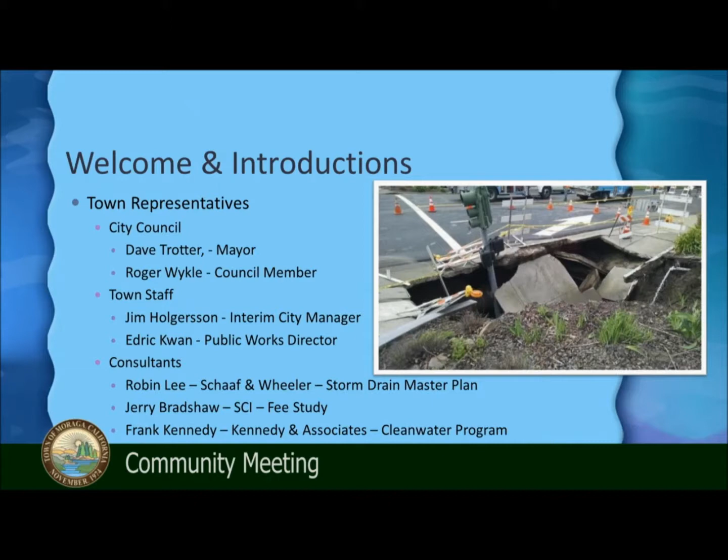So why are we here? I want to leave it on this slide for a minute. This is the infamous sinkhole right down the street here at Rheem Boulevard. This is what everybody saw from above as it was happening. But what you can't see are all the utilities underneath the ground there, including a PG&E high-pressure gas line that the signal light foundation actually fell on and ruptured. We were very fortunate that we had first responders on site immediately, got PG&E out here, and they were able to shut off the gas, so there was no explosion. As bad as the sinkhole was, and it took us a while to repair, mainly because of reimbursement issues, it could have been much, much worse.

So why are we here? This sinkhole - this is underground, let me cover that real quick. This is the culvert underneath the ground in the picture I just showed you. It's an 8-foot diameter corrugated metal pipe culvert, or CMP. Typically CMPs have a lifespan of about 50 years, and that's about where we are with this one. It rusted out at the bottom - what happens is they corrode, water goes through the corrosion, all the fine material in the soils is washed away, holes get bigger, material gets washed away, and eventually you have a void, and everything above it falls into the hole. This cost us about $3.3 million.

We fully expect most of that will be reimbursed, but it's going to take quite a bit of time. So we said, all right, what are we going to do about this? We conducted a survey last fall to assess the public's opinion and check their pulse on the issue, and we were happy to see that 87.5% of respondents value the town's quality of life. Also, 2/3 want to upgrade this aging storm drain system. We also asked, okay, that's one thing to do, but would you mind paying for it? Sure enough, Moraga homeowners were clearly interested in a local funding option to address these needs.

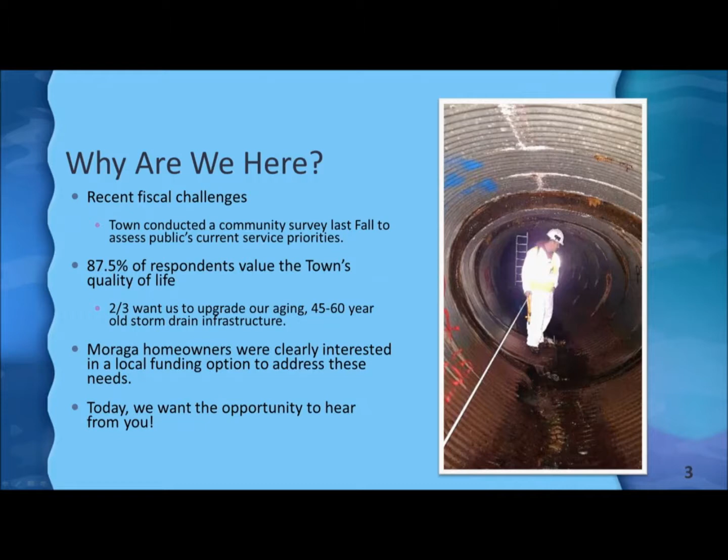So we're going to try to speed up our presentation as much as possible and leave some time for questions at the end. I have one more slide here, just to give you a timeline on where we've been more recently. I applaud the town council back in 2009, prior to my time, when they developed the Revenue Enhancement Committee.

They came up with some critical areas that need investment. They were the roads and storm drains primarily. So the roads were considered to be the highest priority at the time. They started working on that, and that was passed back in 2012, and then the street program was rolled out in 2013.

I think it's important to note here, as part of the road program, if we're going to redo a road, do a full reclamation type of project, and there's a storm drain underlaying it, we will use Measure K funds to fix the storm drains. But it's only isolated areas, mainly catch basins and things that are closer to the surface of the road.

So after Measure K was done, we said, all right, let's turn our attention to storm drain master plan. The master plan was authorized in 2014, completed and adopted in 2015. So we went out again to kind of say, all right, what are the top priorities for the town? That was done in 2016.

Again, storm drains were high on the list. So we looked at various funding options for how we're going to tackle this, and we did a follow-up survey in 2017 with some actual dollar amounts and how they tested. And again, they were supported by the town during that survey. So that's it for me.

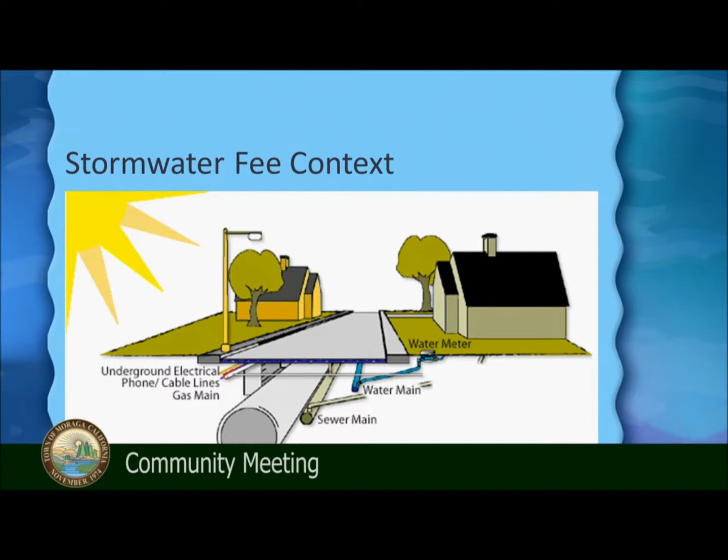The cartoon you see up there, that little diagram, shows a typical residential street - the houses, the street, and the sidewalks. And most of you realize that under the street all the utilities are buried, serving all the properties and helping make it a nice neighborhood. So you're familiar with a lot of those. I'm just going to walk through them. Most of those are utilities - you pay utility bills on those. For instance, the water and the sewer line.

You pay a water bill to East Bay MUD, and you pay your sewer to Central San. And over on the other side, you see the PG&E gas line, electric line, phone line, cable TV - those are all utilities that you pay a monthly bill for in one fashion or another. That last pipe you see there in the middle, that's the storm drain pipe, but there's no storm drain bill. You don't get a utility bill for the storm drain. That's very common for cities in the Bay Area and California, and to some extent across the country. Storm drain utilities are kind of the forgotten child out there.

But that's quickly becoming a bigger and bigger problem for all cities, just like it is here in Moraga. We've tried to put some dollar numbers to all these bills you might be facing each winter.

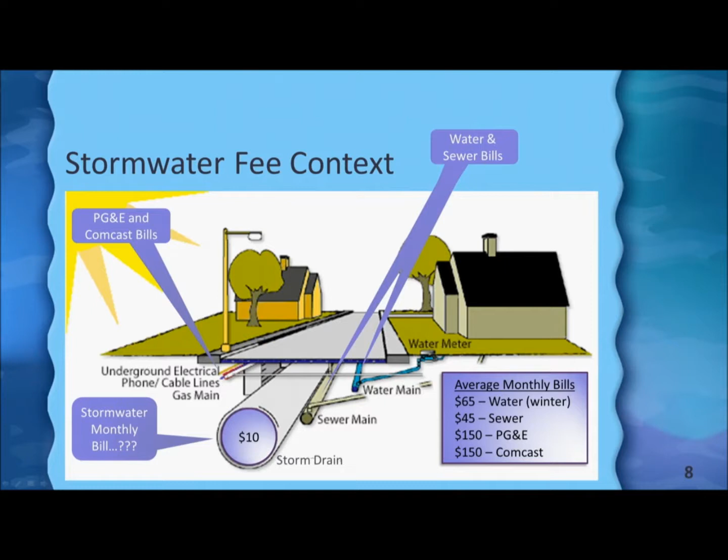Water bill, 65 or maybe more. I think a lot of you maybe pay a little more than that. Sewer bill, around 45. PG&E and Comcast can range all over the place, but they're usually into 3 figures at some point. The stormwater bill, what we're looking at is about $10 a month for the average home. So that's some context I wanted to put in place, and it gives you a historical perspective of what the storm drain utility picture has looked like.

The process I want to talk about is important because this process we're going through isn't something most of you have been through before. In fact, it's kind of new to the state.

In 1996, the voters of California passed Proposition 218. It was brought to you by our friends at Howard Jarvis Taxpayers Association, and you may know that name from Proposition 13. They're the authors of that, and that's where they got their big start. So they put together the Right to Vote on Taxes Act in 1996, and it was made part of the Constitution, and is literally the grandson of Prop 13.

I remember when I first started working for cities in the early 90s, we used to, in order to implement a fee, just adopt it and put it in place. And people would cry, well, what about Prop 13? You have to vote on that. And we would say, it's not a tax, it's a fee. And I think there was a lot of that going on, probably more than there should have been. So Howard Jarvis decided those were some loopholes they needed to close, and maybe rightly so.

In any event, we have Prop 218, which is our guiding document, our guiding law in this situation. The storm drain fee is called a property-related fee, and that was a category that was created by Proposition 218. They had never had a category for that thing before, so they did that, and it is for the types of fees like your water fees, sewer fees, and garbage fees. And that's what they had in mind when they wrote that.

And they put in a two-step process, a public hearing, and then it has to go to a ballot process. And then in the next sentence, they promptly exempted water, sewer, and garbage from that ballot process. So I'm not sure what they had in mind for the ballot process, but it's still there in the Constitution.

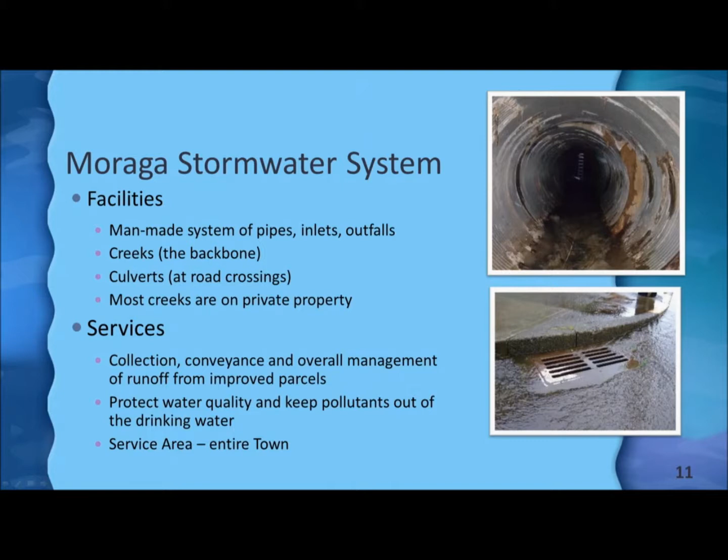So services for stormwater is very similar to sewer and water. Just like stormwater, both utilities need to be treated and conveyed to and from your home. And the last bit of that definition is what is the service area, and that basically is the entire town. With that, I'm going to go right into the first leg of the fee, which involves capital improvements, and I'm going to introduce Robin Lee with Schaaf and Wheeler, who conducted the storm drain master plan, to go into the capital portion of the fee.

Hello, I'm Robin Lee. I work with Schaaf and Wheeler. We are a water resources engineering firm.

We've done storm drain master plans for over 20 jurisdictions throughout the Bay Area, including the neighboring Orinda. I myself have over 12 years of experience in engineering, both in water, sewer and storm drainage. I find storm drainage the most fascinating because as an engineer, it requires the most creative solutions. I think it's a lot more challenging than water and sewer.

So back in 2014, Edric and I sat down, and he came into the meeting with some very large paper maps to show the storm drain system. And I said, you have this electronically, right? CAD, GIS, anything I can put on the computer? And he said, no. This stack, these are our maps.

So step one in our process was to bring those paper maps into digital, and so we did that in GIS. Now the town has the ability to overlay their pipes onto aerials, onto street view, and gets a better sense of where the system is.

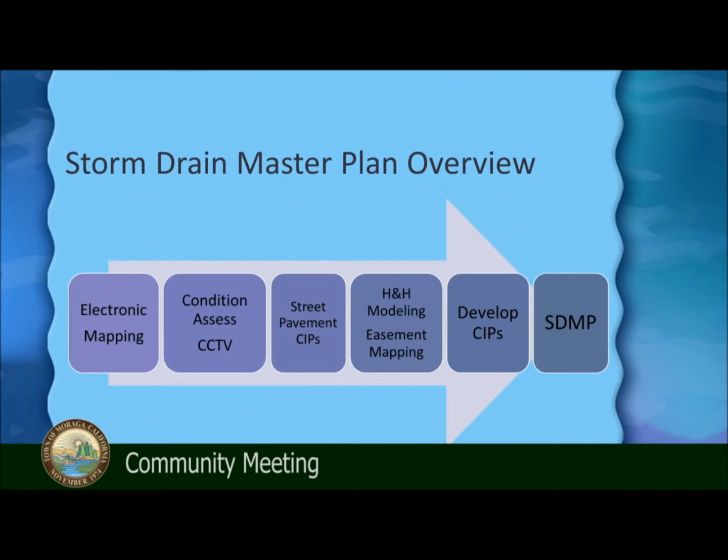So in the Bay Area, we consider the storm drain system to contain a 10-year storm, and the creek system to convey that 100-year storm event. From these models and from the condition assessment that we did, we come up with capital improvement projects. Those are CIPs, and then those are all lumped into what is known as the Storm Drain Master Plan. That's a document, an overview of the system, a very high-level assessment of the storm drain system, and that was adopted by Town Council in 2015.

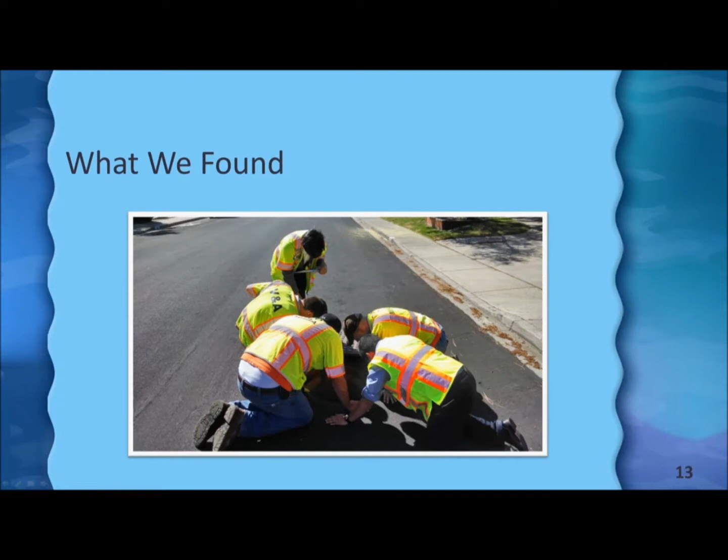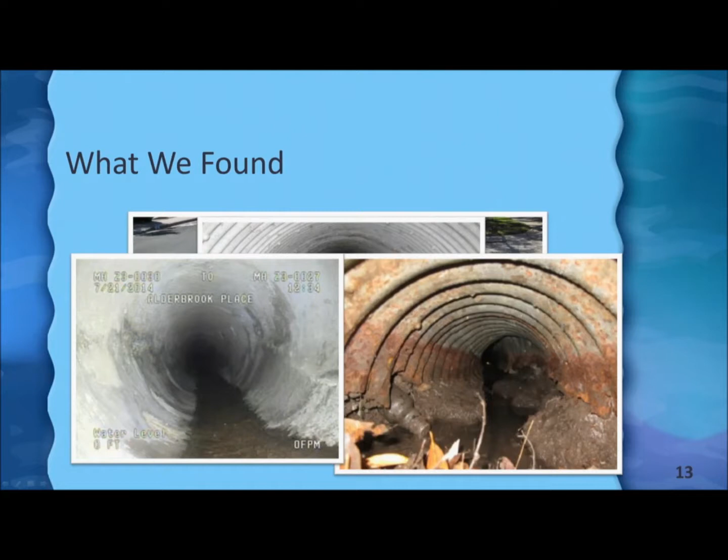They do deteriorate. Good news is that the majority of the system is concrete pipe, and concrete pipe lasts. There's a reason why the Roman Empire was so great, and that's concrete. It lasts, it does really well.

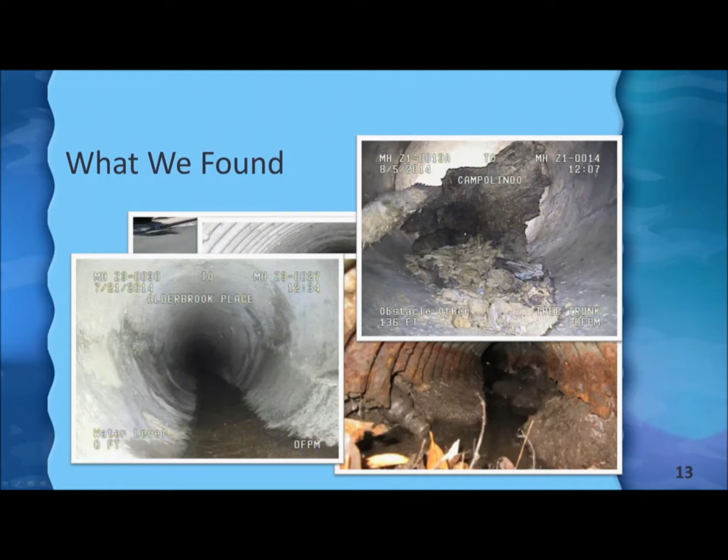So ultimately we took all these different projects and we ranked them, or prioritized them, based on the impact to the community. If it's a pipe that's very large and has the potential to create a very large sinkhole, that's a very high priority project. If it's a pipe that is maybe very high in the headwaters and is smaller, and the potential impact to the community is lower, then that is low priority. What we're here today talking about, and Jerry's going to tell you more about this, is the high priority projects, roughly $9 million worth of improvement projects.

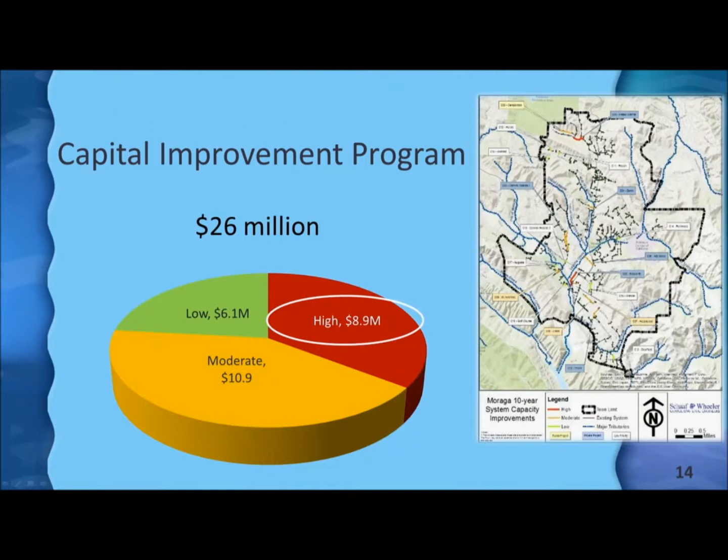And those improvement projects are broken down into different categories. We have the storm drain capacity projects, those are the ones that came from the models that we built. Then we have the storm drain conditions, that comes from the televising and the crews that looked at the structures from the ground. And we have the projects that are coinciding with street pavement projects. And then finally, we have the creek culverts, those are the large creek crossings under roadways.

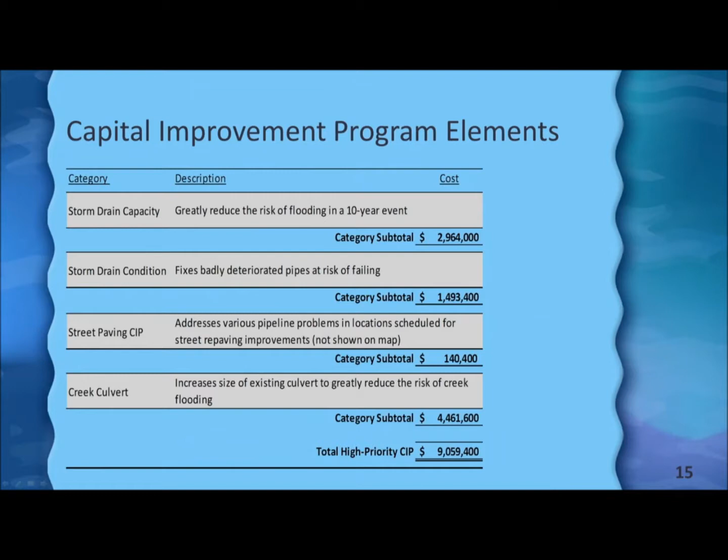Thank you, Robin. So Robin first talked about the first element of the fee. I'm going to talk to you about the second two elements, the first of which is the maintenance portion, the operation and maintenance element.

Currently, with inadequate funding, we are being very reactive when it comes to maintenance issues. We're able to annually go through all the storm drain inlets to look inside and see if they're full of debris, and then remove it. But we're not able to conduct a thorough program, and I'll go into more details.

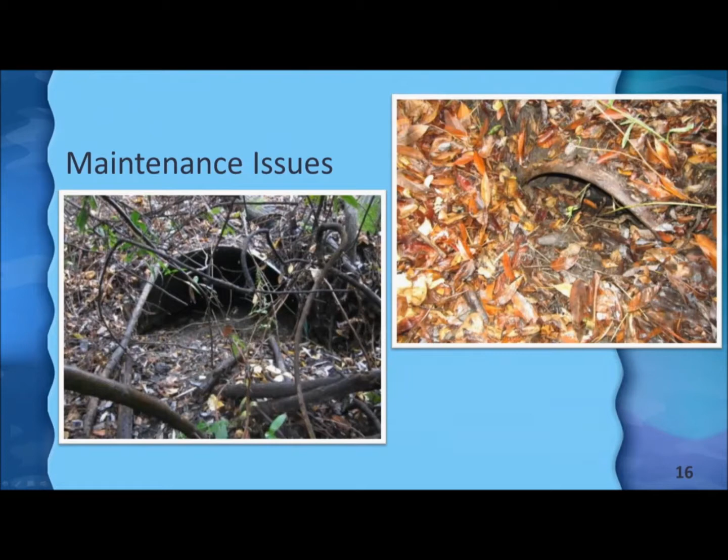So some of the maintenance issues we see are situations where outfall structures are full of debris. We see clogged inlets causing localized flooding, as well as pipes full of silt, which reduces capacity and can potentially cause flooding in your neighborhoods.

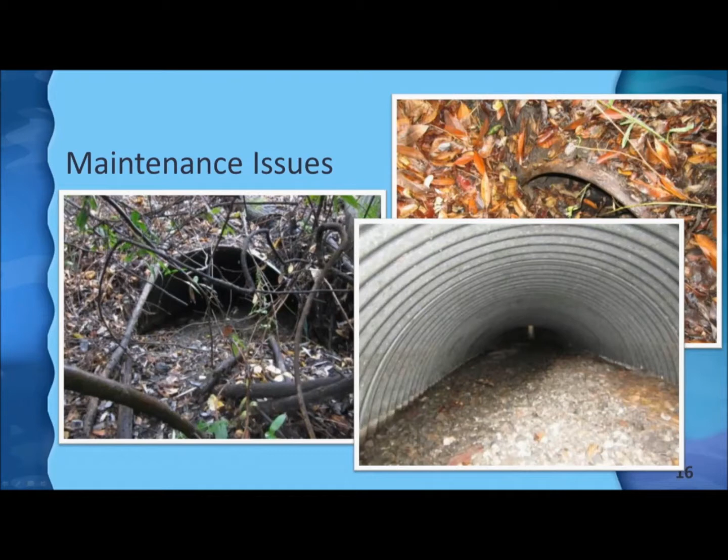So the maintenance improvements, if a program were put into place, will require video inspection of our stormwater system on a routine basis to assess its conditions. This allows the town to identify and remove sediment and debris before they accumulate and cause flooding problems. Additionally, if isolated damage is encountered, spot repairs can be completed before the damage gets worse and leads to more costly failures like the sinkhole we've experienced down the street.

This O&M, operation and maintenance program, is really a critical component of the stormwater system services, mainly because it will help extend the life of some of those moderate and low priority projects. If we're able to go in there and stabilize it, that life would be longer, and it won't become a high priority project or a failure.

So when we're out there with our O&M program videoing these pipes, if we see a pipe wall riddled with holes, we can efficiently line that pipe segment.

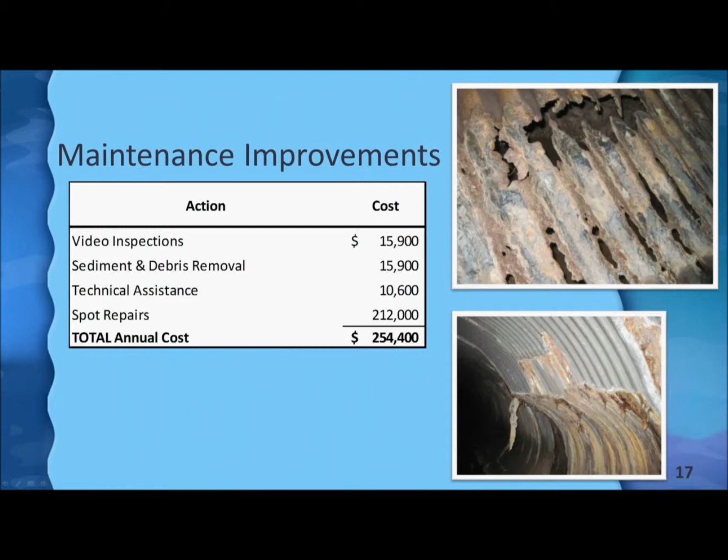If we see buckling, in this case we can efficiently remove and replace that particular pipe section through a spot repair. If we see the bottom of the pipe full of silt, we can deploy a vactor truck out there and vacuum it out.

And if we see the bottom of a pipe really missing, like in this case, we can go through there and resurface the invert of the pipe. In all those cases, the pipe as a whole lasts longer. It doesn't require us to go in and replace the entire pipe. So that really is the main piece of the O&M element of our program.

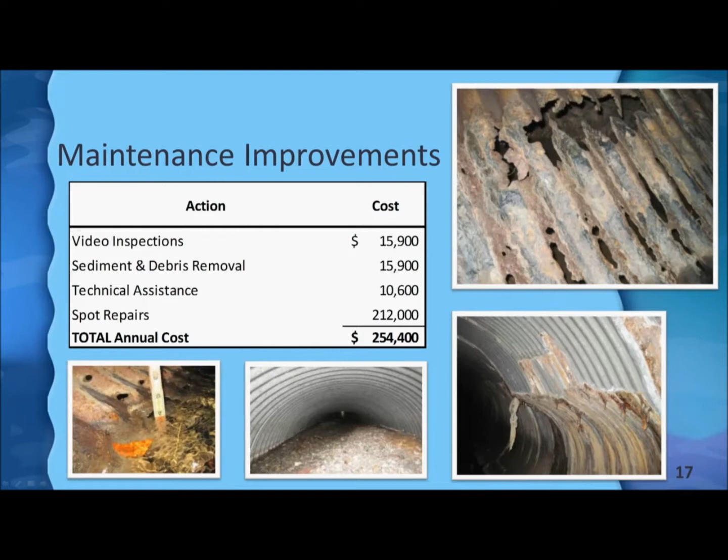The third leg of the fee is about clean water requirements. Just like water and sewer utilities, stormwater requires mandated treatment. The Federal Clean Water Act of 1972 requires states to issue what we call an NPDES permit, the National Pollutant Discharge Elimination System, which really doesn't mean anything in our terms, but what it really means is a clean water permit, things we have to do to preserve our waters in the creek and the bay.

This includes a variety of different elements the town is mandated to complete, and unfortunately it's an unfunded mandate. This includes removing basically all the trash from entering our waters by a pretty close date, I think around 2020 or 2022, when we have to have zero trash. That's something the agency has to deal with.

We also require low impact development to treat runoff from any new subdivisions and developments, as well as making sure they're maintaining those facilities properly. We are required to install green infrastructure, things like bioswales and bioretention to treat runoff, and this will be part of our capital improvement projects. Our projects will trigger these requirements, and we would start installing some of these green infrastructure elements to treat it before it goes into the system.

Other things such as hydromodification—what that means is before we paved the roads, before we had buildings, it was nature, and when water ran off into the creek, that flow was that flow. But once we put in impervious surface, now there's more water going into that.

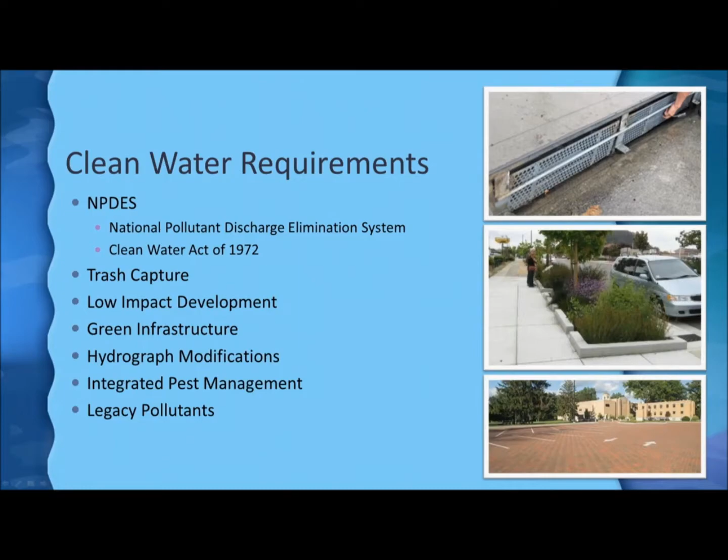That's the third portion of it. I'm going to hand it back to Jerry to go through and talk about the stormwater rates and how they're calculated.

Thanks, Cedric. So we've been getting a lot of questions about how we calculated the fee and what it's based on.

Just like with any utility, water system or sewer system, we try to allocate the costs on a fair share basis. All the properties should pay just their fair share of what it costs to handle all the stormwater in town, and we use the amount of impermeable surfaces.

Let me explain that. Take this sponge. If you were to sprinkle water on it to simulate rainfall, the water would permeate into it, so it's a very permeable surface. But if you were to plaster over part of it, maybe a little miniature house, a driveway, a back porch, then that's not permeable anymore. The water wouldn't soak into the sponge, it's impermeable.

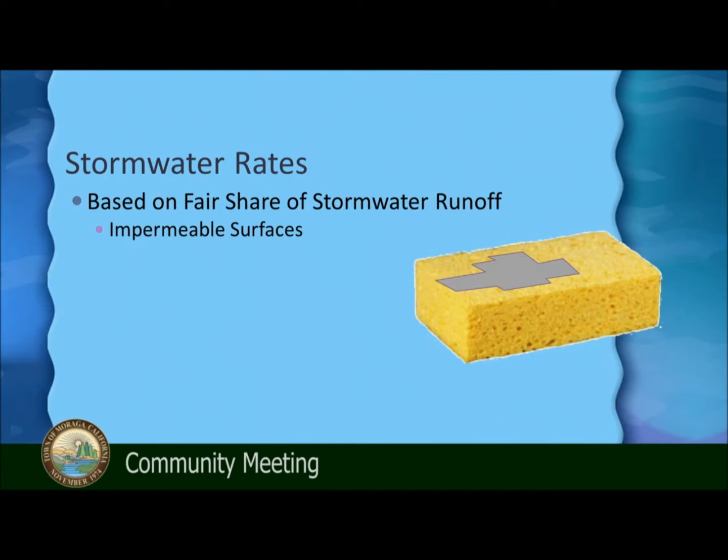So we can calculate the amount of impermeable surface on basically all the parcels in town, and come up with the fair share of impermeable surfaces that different types of properties have. That's what we've done throughout the town.

We didn't do every single parcel in town. We did it in groups of classifications, because there are about 6,000 parcels in town, so that would be more than it's worth.

We broke it into two basic categories, residential and non-residential. 95% of the parcels are in the residential category, but they come in smaller lots and bigger lots, so we broke those into four lot sizes: small, medium, large, and very large. You can see the sizes in the rate schedule we'll get to a little later.

We sampled a good sampling of each one, about 5 or 10% of the number of parcels in each group, and came up with an average amount of impermeability on a percentage basis. We applied that percentage to the median-sized parcel in that group, and came up with how much impermeable surface there is. So we have all the residential figured out.

Then we went to the non-residential, which is a different animal, because you can't lump those into size categories. A commercial site could be a half acre, like maybe where 7-Eleven is, or it could be 10 or 15 acres like a shopping center, yet they're the same type of commercial use.

So instead, we broke it into categories that have similar impermeability characteristics. For instance, commercial is one category, office is another, schools and other institutions which have bigger green areas are another. We took samplings of those, and in some cases there were so few we actually measured all of them and took an average of the whole group.

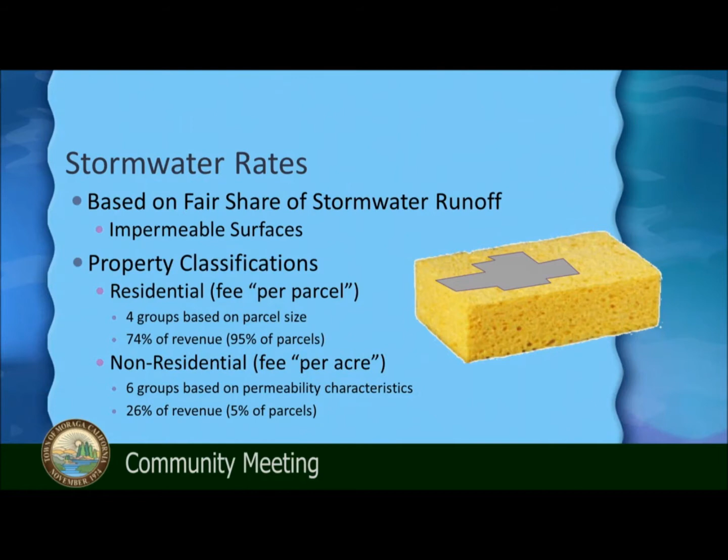Incidentally, 95% of the parcels in town are residential, but they only carry about 74% of the financial burden, which is understandable. Commercial properties have a lot more impermeable surfaces with parking lots and so forth. They don't have yards and green areas in the same proportion that homes do.

We ran into an interesting situation here we don't see in every town, and that's 22% of the storm drain system is actually in private hands. You have some HOAs that have large areas of private streets and private storm drains, where in a lot of towns those would be handed to the city when they built the subdivision, but not always. Some cities have them stay private. In this case, about 22% of the system is in private hands, but it's still a collective system. It's built just like a municipal system, it's just funded through the HOA instead of through the town.

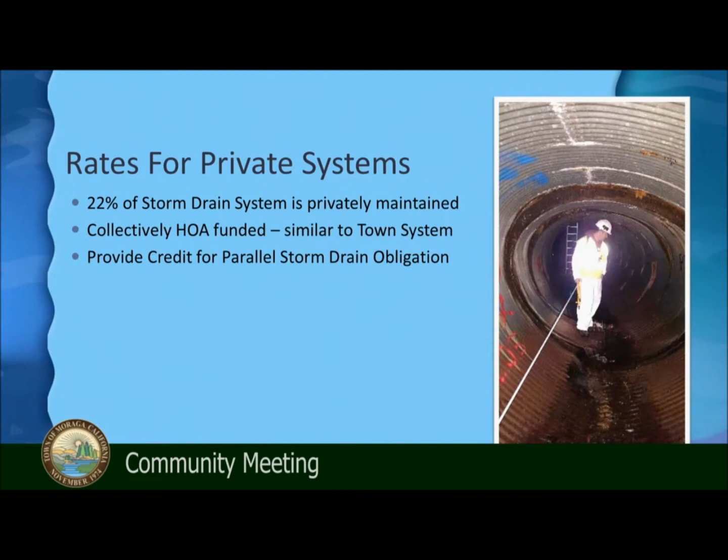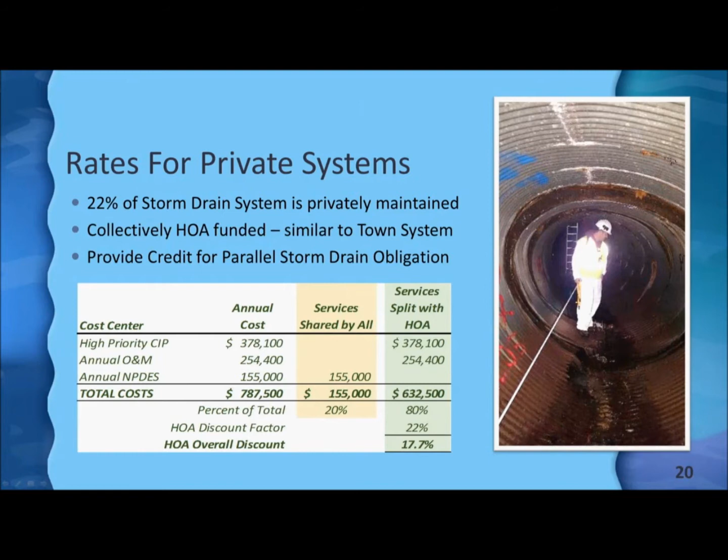There's a few other features of the rates that go beyond just the numbers. There's fiscal controls and accountability. Proposition 218 requires that the money collected for storm drainage can only be used for storm drainage, and it has to be put into a separate fund, so it's not commingled with the general fund. So the council or town manager can't take this money and go buy a police car or a new playground or something like that - it has to go for storm drain work only, as defined in the rate study. And because it's set aside, all the annual audits will identify this fund all by itself. You can see what came into the fund, what was expended from the fund, and you might see examples of what it was spent on. There'd also be a citizen oversight structure put in place, similar to what you have for the Measure K streets program.

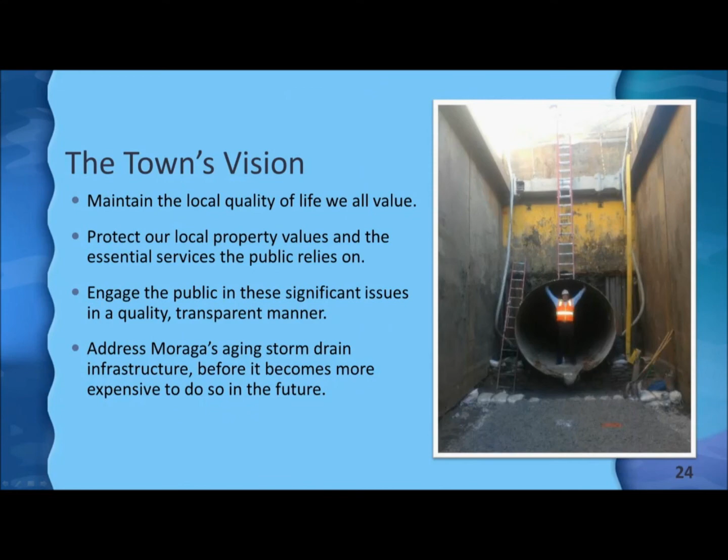And so we do value your input. The things that we're trying to accomplish here are basically three. One is to repair our deteriorating pipes and infrastructure to prevent system failure and future sinkholes. It's also important that we protect clean East Bay MUD drinking water, which benefits all of us. And we want to protect the town against future flooding.

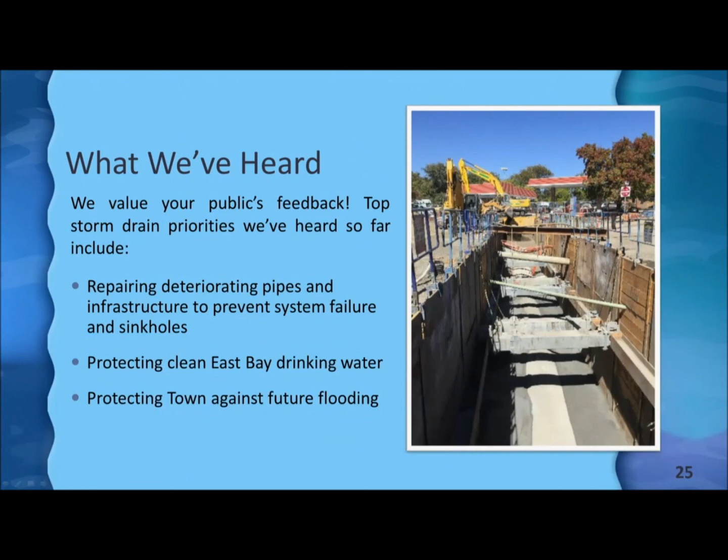We'll start now. If you belong to other organizations that need to know this information, we can certainly send somebody from the town to try to explain what this is all about. Would also encourage you to stay informed by visiting the town's website, where there is a current link to storm drain funding, and more information will be placed there over the course of the next several weeks as we move forward.